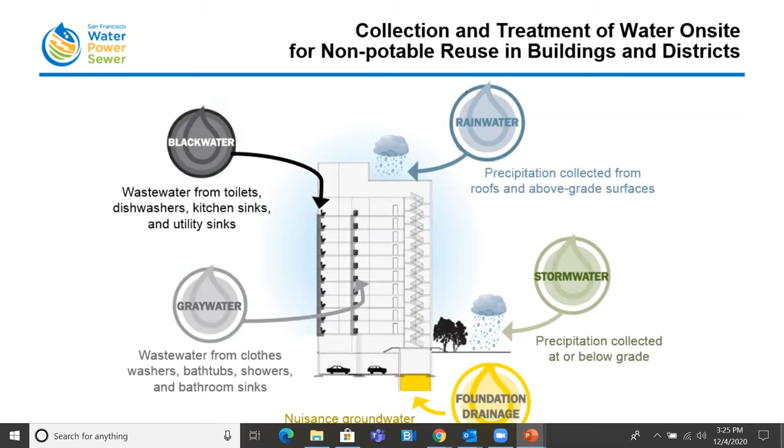and taking various alternative water sources, whether it's rainwater or stormwater or foundation drainage or gray water or black water, again, capturing that water, treating it, and all doing this locally on a decentralized scale, and reusing it for non-potable applications, most commonly used for toilet flushing, irrigation, cooling applications, and in some cases, clothes washing.

So what we've been doing on a national level is we formed a collaborative, and it's really a unique partnership between public health regulators from local, state, and federal public health regulators, as well as water and wastewater utilities across North America, as well as US EPA and the US Army. And this collaboration really is unique. It's an opportunity for public agencies to get together to talk about the challenges and solutions associated with on-site water

recycling in our communities. We also collaborate with the U.S. Water Alliance, the Water Research Foundation, and the WateReuse Association. We started this collaboration in 2014, and so we're going on 6 years. It's a voluntary effort, and it's only growing. And I mentioned North America because we have City of Vancouver and Toronto as our partners as well.

And in 2016, we did establish our formal name, the National Blue Ribbon Commission. We actually established that in the White House Summit when President Obama had a White House Water Summit. We made the commitment to form a collaboration and accelerate on-site water recycling throughout the U.S. And that really established the formation of the National Blue Ribbon Commission for on-site non-potable water systems.

And really some of our key issues I just want to touch on, and some of our principles and practices, is really to create consistent water quality standards from state to state. Currently, if you're in Colorado or you're in New York or California, the standards for gray water, for example, may be very different. So we were trying to create consistency.

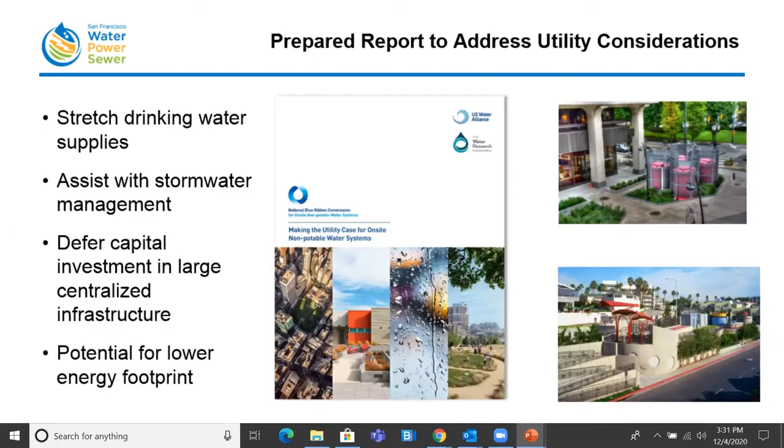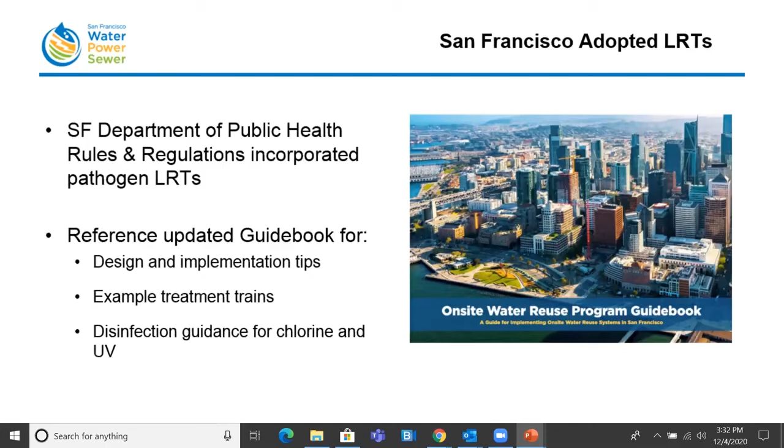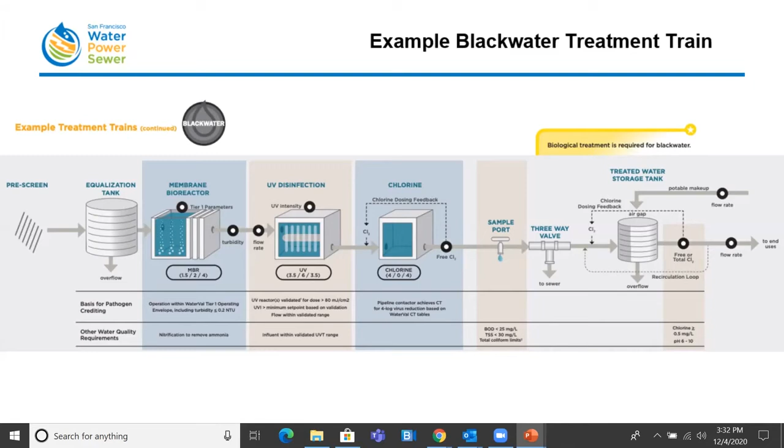We also provide example treatment trains, and a lot of guidance and lessons learned from San Francisco. So I'd encourage you to take a look at that. And just to share with you, this is an example of a treatment train to treat blackwater on-site for toilet flushing and irrigation. You may not be able to see all of the detail here on the screen, but the guidebook is meant to get into very detailed information to understand how do you get the credits, and also tips in terms of operating and treating these water sources.

California, I don't want to talk too much because I think you just had a great presentation on SB 966. We're very excited and very happy that the state board's moving forward on developing risk-based water quality standards for the state of California. We look forward to participating in the stakeholder outreach, and we're very excited about all the great work that's happening at the state.

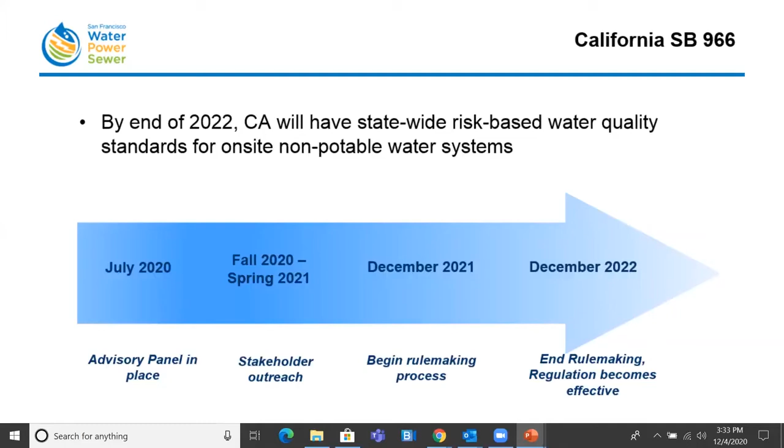But it's not just California that's moving forward on legislation. Colorado has actually already gone ahead and amended Regulation 84. And what 84 is about is it differentiates between centralized and on-site non-potable reuse treatment systems.

And what it did was it expanded and allowed for non-potable end uses for toilet flushing and urinal flushing from Blackwater treatment systems on site. And as well, Colorado has incorporated the log reduction targets for the on-site treatment systems. And again, as a whole, they're moving all of their regulatory structure towards a fit-for-purpose public health target. So we're very excited to see that Colorado has already moved forward.

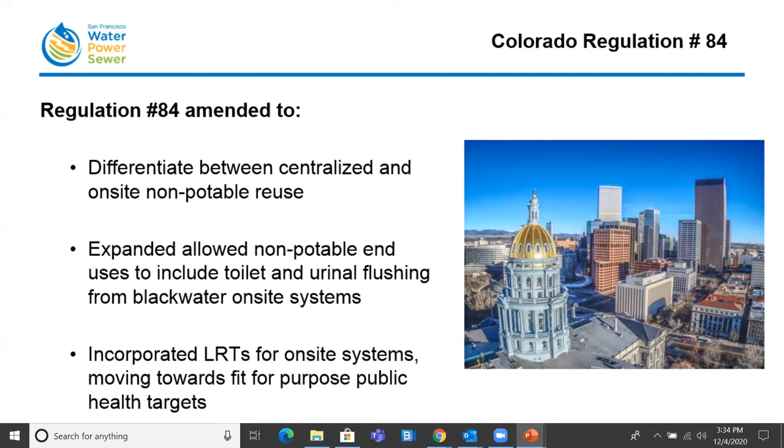And that really has enabled Denver Water to install an engineered wetland treatment system, a living machine similar to the system that's in the San Francisco PUC headquarters. They completed the construction. This is inside their lobby. They can treat about 7,000 gallons a day. They'll be treating both Blackwater and rainwater to meet all of their toilet flushing and irrigation demands. They'll be saving about 1.4 million gallons of potable water each year. Unfortunately, the building's not occupied, so the system is on standby, but it has been constructed and completed.

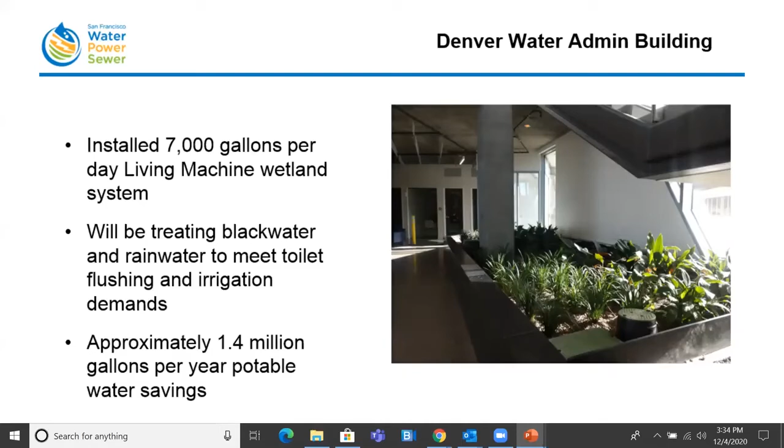Austin, Texas is another example of a community that has really embraced on-site water reuse. They have a Water Forward plan, and that plan actually projects that there will be a development of 10 million gallons a day of new supply just from on-site water treatment systems by 2040. The photo here is actually Austin's new permitting and development center that will be collecting and treating Blackwater, rainwater, and condensate to flush the toilets as well as to provide water for irrigation. Similar to the Denver example, the building is not currently occupied, so the system is not able to come online, but hopefully in '21 they'll be able to occupy it, and they anticipate saving about 1.5 million gallons of potable water each year.

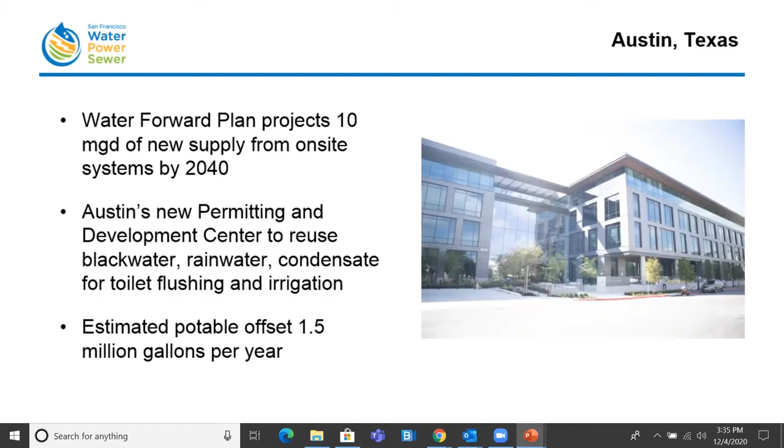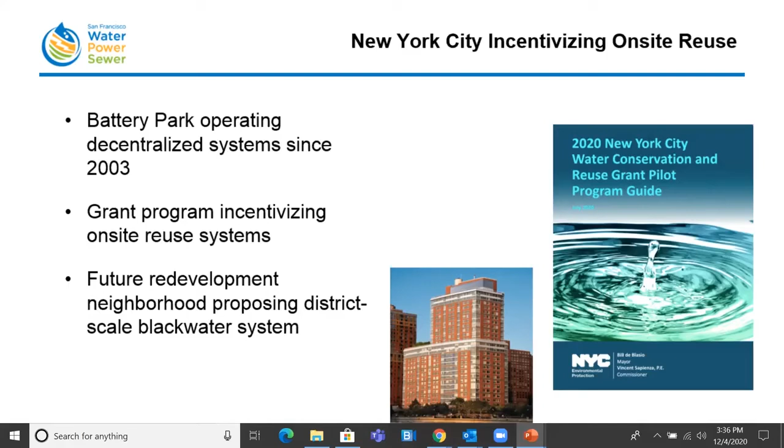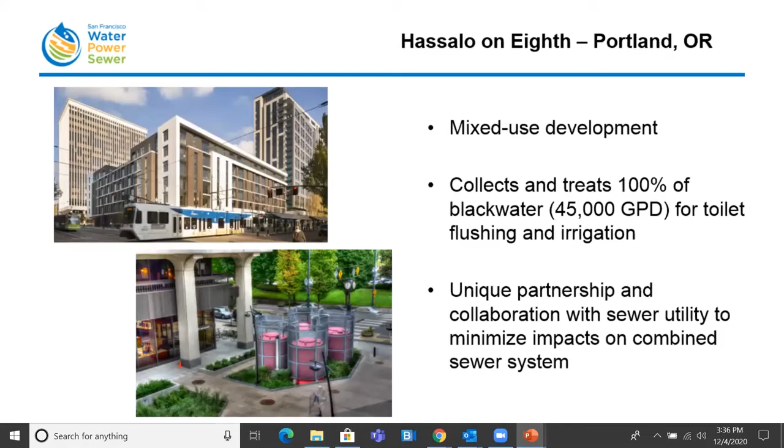Hassalo on 8th in Portland, Oregon is currently in operation. It's a mixed-use development. It collects and treats 100% of all the Blackwater, about 45,000 gallons a day, for toilet flushing and irrigation. And this project was a unique partnership between the developer and the sewer utility as a means to minimize any impacts on the combined sewer system in Portland.

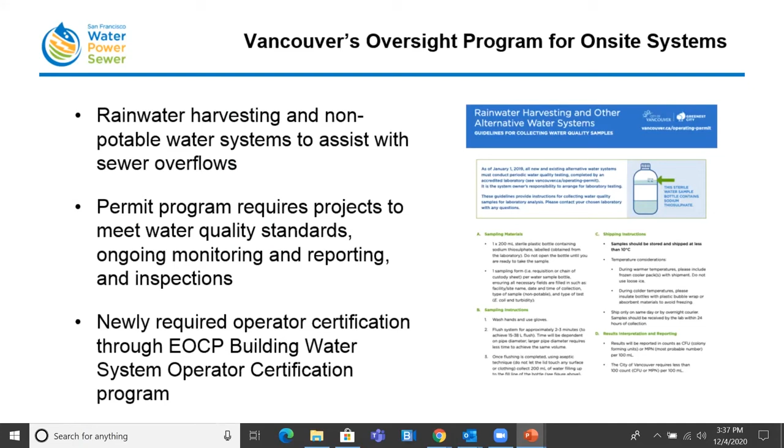The city of Vancouver has a very extensive operator training program for on-site water treatment systems. They have rainwater harvesting systems in the city of Vancouver to help with sewer overflows. An on-site water treatment system is not mandated, but if they do install one, they need to use the water for toilet flushing as well as for irrigation. They have a very extensive permitting program as well as an operator certification program, and it's to encourage the proper ongoing monitoring and reporting for these treatment systems.

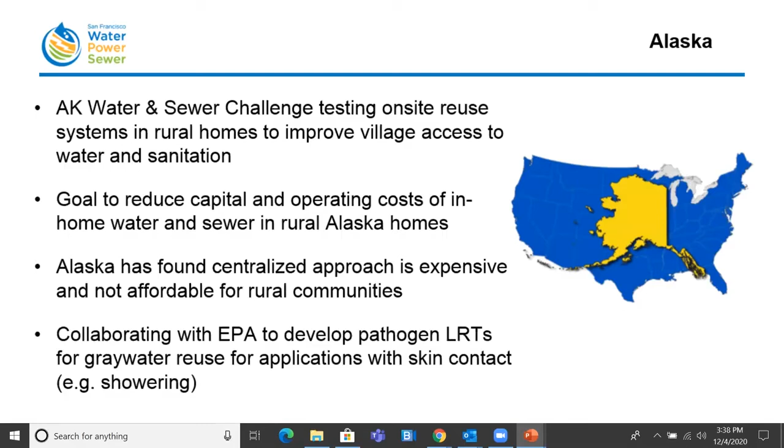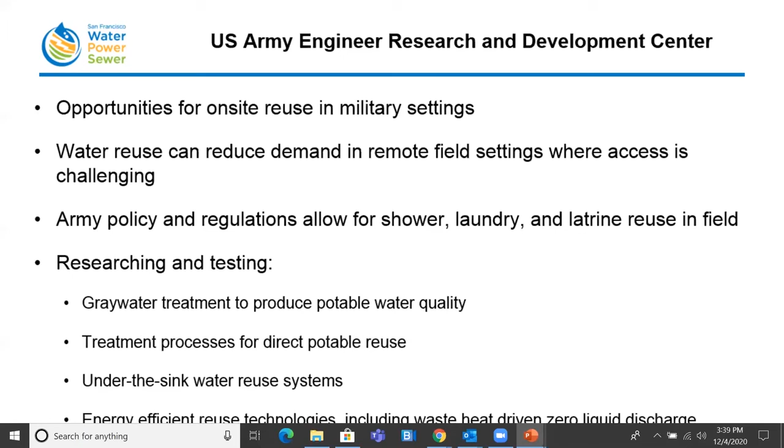And they're researching a number of different systems for gray water to produce potable water, for treatment processes for direct potable reuse, as well as under the sink reuse treatment systems. And so they're doing a lot of exciting work in the area of on-site reuse.

We've also been working very closely with EPA. As I mentioned, they're one of our partners in the National Blue Ribbon Commission. They recently released a calculator. It's been in draft form, but it will be released at the end of this year. It's a tool really to help communities look at what it does mean to have an on-site water treatment system in their community. And each community can import their own data in terms of where they are geographically across the US, and look at, again, the benefits that a community may see.

And so it's an important tool and a calculator, and I will share with Dennis the link when we get the calculator available. Currently, what we're working on under the National Blue Ribbon Commission is really looking at operators and operator capacity. We recognize that we want to increase the number of operators and skilled operators to run these on-site water treatment systems.

What's unique about on-site water treatment systems is it's not necessarily a water treatment system, it's not necessarily a wastewater treatment system, it's treatment technologies that actually incorporate both types of technologies commonly used in water and wastewater treatment. And so we are developing, again in partnership with the Water Environment Federation, a certificate exam for increasing the number of certified operators. And so we're excited about this opportunity and look forward to moving forward on this in the coming year.